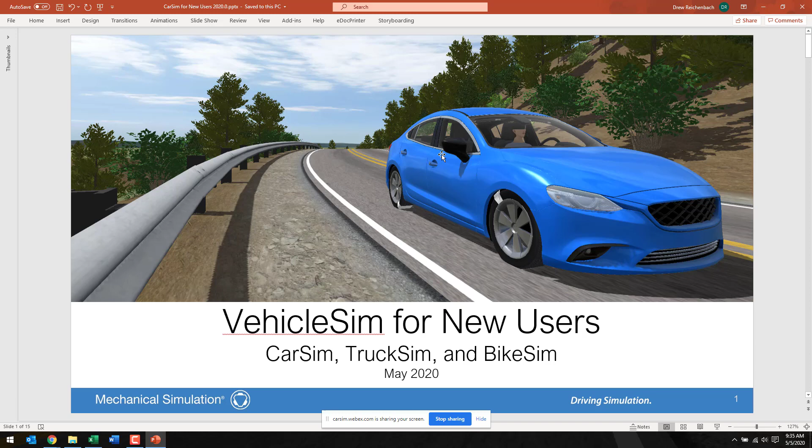I was only looking at this slide while I was talking, so it works out. Interestingly enough, this is actually a screenshot from our animator that we took on one of the roads. One of my coworkers found a really good camera angle, and so we added in a lot of trees and things to make it look pretty, and took a screenshot. I've liked it so much that I have stuck it as the first image in the training slides.

All right. So here is the overall agenda that I was talking about. We've got the introduction where we're going to talk about the parts of the software, navigating the user interface, documentation, help, where to find them, how to use them, and running some basic examples, just to kind of get started. So it will be hands-on. There'll be some switching on my part back and forth between PowerPoint and the CarSim user interface to show everybody how to do that stuff.

We've also got some discussions on the vehicle model, where it comes from, parameterizing it, configurable functions, kind of an overview of everything in there. If we were to go in detail into the vehicle model, we would probably spend about 100 weeks because there's a lot of different choices, and it really all boils down to we have to be able to simulate the types and sizes and design of all of the vehicles currently on the market, plus things that people are still inventing. And so that means that the model is pretty extensive, especially now that we're moving into the ADAS and autonomous vehicle kind of environment.

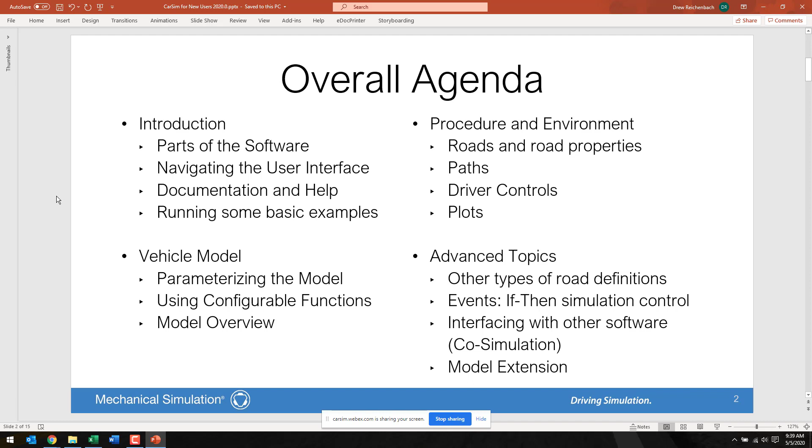And so I expect to get probably through the introduction portion today. And so today's agenda is going to be focusing on the introduction. We'll talk about the parts of the software, get some basic terminology, some jargon down, so that when I say database and you guys hear database, we're all thinking about the same thing, at least as far as CarSim goes.

We're going to do some navigating around in the UI. This can be one of the parts where there's the steepest learning curve, just in terms of making sure that the input you put in gives you the simulation that you're looking for. We'll talk about the documentation and help and things like that, and we're going to run some basic examples. And I've got two of them. I've got one that I call an example, which is putting some new tires onto a hatchback. And this example, we'll work through it together.

And then I've got what I call a task, and it'll be modifying the center of gravity on a utility truck. And that one I have more designed as I give you some basic instructions, and then I turn you loose to work on it for a little bit. And then we walk through it afterwards, because it's sort of one thing when we're all talking and going through it together, and it's another thing entirely to have to synthesize the information to do something a little new.

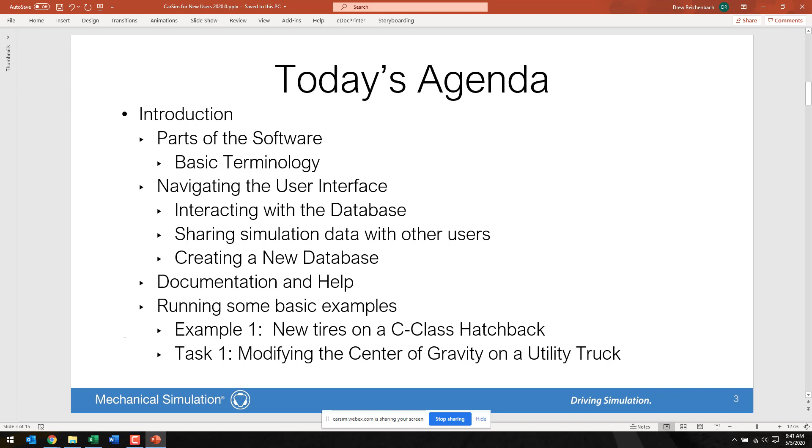All right, so let's really dive in then. Start out with, what is CarSim? So CarSim is a tool for simulating vehicle dynamics, so really the vehicle response to various inputs. There are three main parts. There's the VS browser and the database, and that's the user interface and how you can parameterize your vehicle model. There's the VS solver program, which actually takes the parameters and runs the simulation. There's the VS visualizer, and that is for animation and plots.

And you can do animation and plots together, which actually turns out to be really very useful when looking at the vehicle response to what you're doing, because you can see both the state of the car visually, which conveys a lot of information, as well as what's going on in the output plots. And you can see how they're kind of connected here.

The browser has some camera information and animation information, which it passes to the visualizer, and the model information to the solver, which when you execute it gives you simulation results, which also feed the output. So the three main parts really are the browser, the solver, and the visualizer.

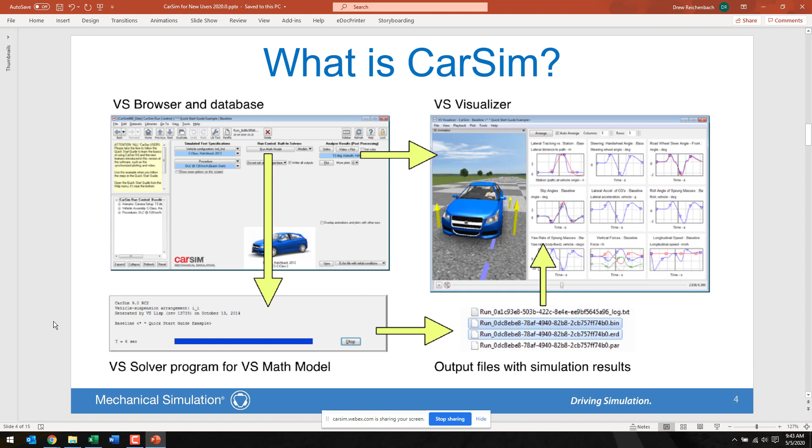So we'll start talking some useful terminology. So to start, I call it the VS browser. VS stands for Vehicle Sim, and it sort of is the umbrella for CarSim, TruckSim, BikeSim, SuspensionSim. Anything that sort of works commonly across the tools tends to get the prefix VS for Vehicle Sim. So the browser is the name for the user interface, and as you'll see, it has a lot of the feel of a web browser.

There is the solver, the VS solver, right? And this is the one, it uses numerical methods to solve the dynamics equations, right? And it's one of the most important parts about working with CarSim or any vehicle dynamics simulation tool, is to remember that we're not actually driving a vehicle. We are driving some equations, and the inputs are going to be discrete instants in time.

And so where the real road might be smooth or might have bumps in a certain pattern, because we are sampling, although we're sampling at a very high frequency, 2000 hertz, we are still sampling. And so we can only really respond to dynamics right within that frequency. And you can always decrease the time step, which of course increases the simulation time. But we've found generally that the default time step works for most systems. It is possible to make it stiff enough that you'd want to decrease the time step, but that's not very common.

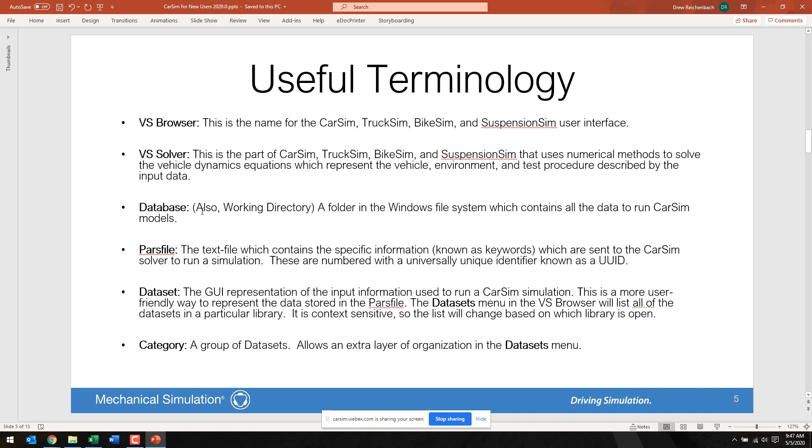We have something, I'll say category a lot, category and data set. Category is just a group of data sets. There's nothing really unique about it. It just allows an extra layer of organization in the datasets menu. So handling simulations can be grouped together, or vehicle information about a C-class hatchback can be grouped together, things like that. Makes it easier for us humans to find our way around in the database. Okay, a little bit more.

I'll say library an awful lot as well. And so the way the UI is organized is into libraries. And libraries will be for groups of data sets that focus on the same set of model input data. For example, you may have, say, a rear suspension kinematics data set for a C-class hatchback and also for a B-class hatchback, or a sports car, or a heavy truck, or a pickup truck. Those would all be individual data sets that exist in the rear suspension kinematics library. So it's a way to group them together. Sometimes we call them screens, or in the documentation we might call them screens, because each library has sort of a unique view in the user interface.

And there's something called a dataset link, and these are often called blue links, which when we look in the UI, you'll see when you form the link correctly, the color is blue. It's got two parts. It's got a ring control on the top where you can pick the library, and then the link itself, which is often below that, which serves to help you to connect data in different libraries together.

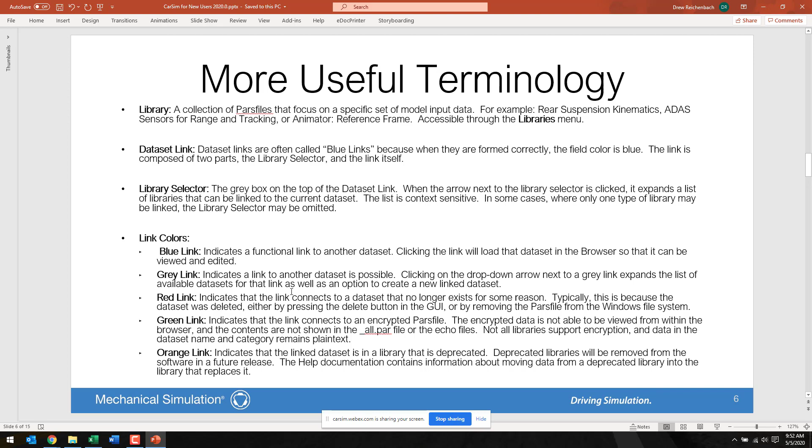But there will also always be some help documentation that says, here is how you go from the library with the orange link to its replacement. So there's always information on how to convert that. That is a lot of new terminology, but it gets us started and hopefully on a common playing field when we start.

That documentation is particularly important, and we'll use it a lot today, because a lot of the content in the vehicle model is modular, meaning if you don't have an ADAS sensor parameterized and installed, then we're not going to do the calculations for the ADAS sensors, and we're not going to write the outputs for the ADAS sensors.

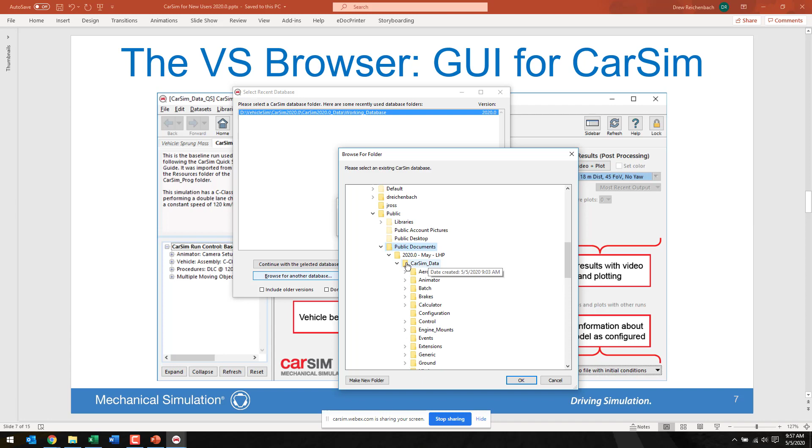So this is one of the default places. You can get sort of two cases. One is that will be installed if you install just for the local user, it will be in say my folder here. I installed CarSim for all users of this computer, and so it puts the database in the public documents folder. I added another folder level there, but you'll see a folder named CarSim data, and you probably have that one by default in that window.

So when I picked the database and clicked OK, it found it and it brought up the license setting windows. And this window, you can, if you've only got one license or you always use the same configuration, you can skip it. There is a box down here in the lower left-hand corner that says don't show this window when starting. And if you check that box, then whatever licenses you have checked out in this list will be the ones you always check out by default.

If you check the box and then find later that you want to change the settings, that's fine. You can do that from within the browser. But if you're doing maybe some testing that's driven by automation, you maybe don't want to see this window all the time, and so you can suppress it with this checkbox.

So I'm going to keep all of these licenses. This is my local machine license. There's also this column here called key ID. And the key ID is important.

That's your license number. And so when you call into tech support or you write into tech support, one of the first questions we're going to ask is, what is your key ID? It helps us make sure that the license is in maintenance, and it helps us see what features you have. So if I see in here that, for example, if I did not have a CarSim trailer license and I was trying to use trailers, then I would say, oh, the problem right here is that we need to add a trailers license to do what you're trying to do. And you can contact your account manager and they can help you out with that sort of thing.

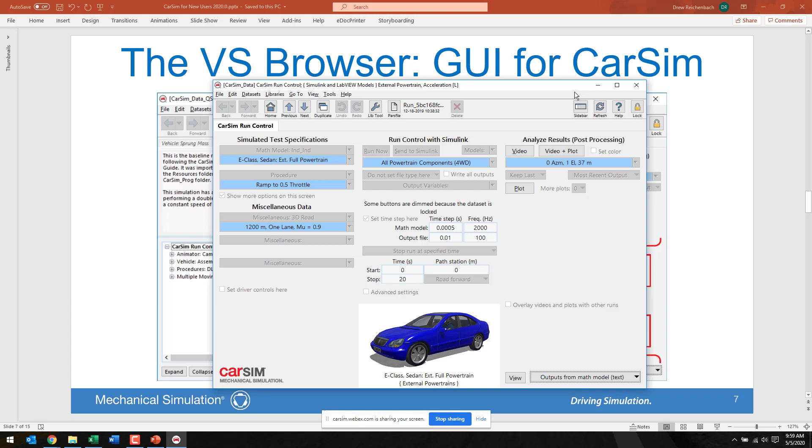All right, there we go. Of course, I was viewing a different data set in here before I copied it. So when it loads, you will probably see this view right here. I'm going to minimize the slides so it's not so distracting behind it.

Here we are. So this is the same view that I had sort of taken a screenshot of. We've got the test specifications and the center where you can run the simulation, and then the third column where you can see the results.

One of the things we do when we ship CarSim is just before we build the installer, we run all of the examples. That means that all of the example data, even if you don't have a license for them, you can at least browse and see how the data is configured in the database, and you can view the results.

So if you were going to use that trailer license to run a simulation, but you didn't have it yet, you could still see the trailer input data screens, and you could watch how that simulation would perform in the plots and the video. It's just that you couldn't run the math model.

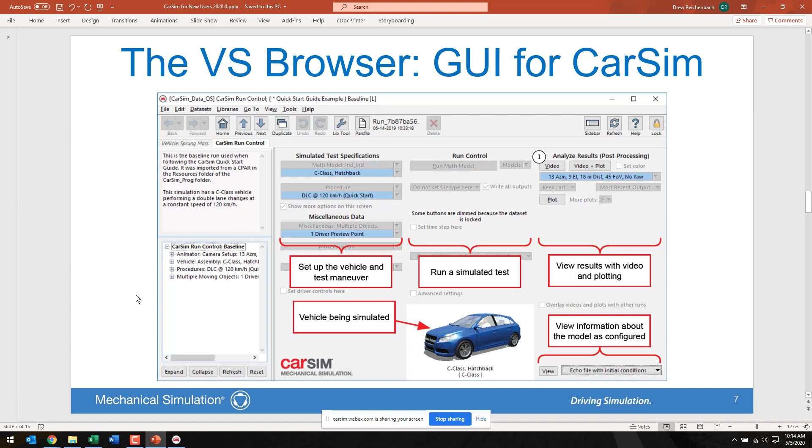When looking at the user interface, one of the key things is you can check up in the title bar for the window, and it helps that I can blow this up on the screen in PowerPoint. You'll see the little CarSim logo at the top, and then there's a bunch of information that is always useful so you can tell where you're at.

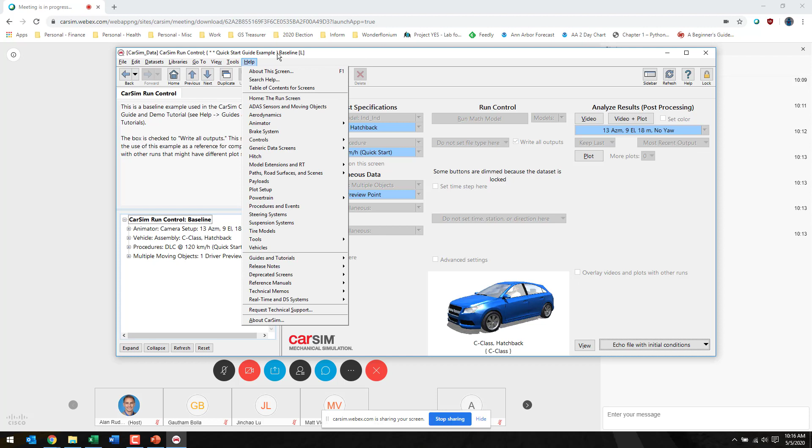As you go through the user interface, I'll switch back over here and bring up CarSim again. Let's see, let's make this, yeah, it's probably about as big as it can be right now. Up here in the title bar, I've got CarSim data, run control.

And if I was to pick another data set, here, let's do this one. You can see that in the curly braces, it changed so that the category is now ADAS and active safety, and the title of the data set is ACC, adaptive cruise control, 4-lane road with forward and opposing traffic. There's also this little L after the end, which means the data set is locked.

In this context, locked means read only. You can lock the data sets so that they're read only, and you can unlock them so you can edit them. Depending on what I'm doing, I'll either unlock everything or just unlock the thing I'm working on so I don't accidentally make a change.

I have spent like a day and a half one time trying to debug why something wasn't working, only to find that when I was gone, it was because my cat sat on the keyboard. So those things do happen. I've learned to keep my data sets locked when I step away at home.

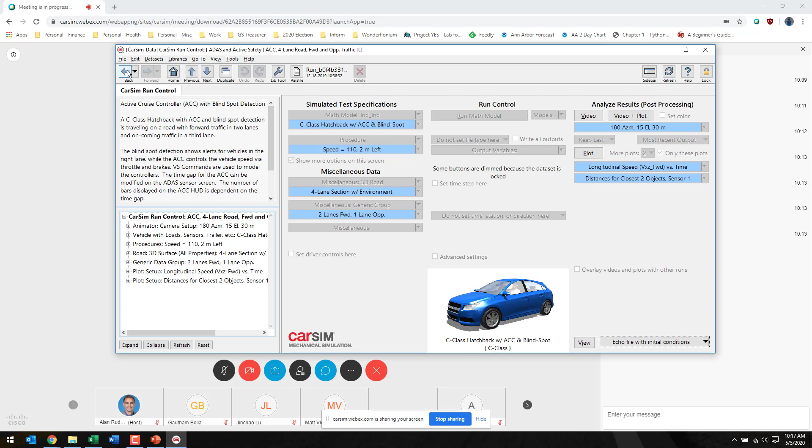All right, so I'm going to click the back button, go back here and go to the next slide so I can blow it up. The user interface works a lot like a relational database sitting underneath a web browser.

In that vein, the top button bar here, just below the menu, is full of buttons. There's a handful of buttons for controlling the data set you're viewing. I sort of called them view control buttons, though that's not really an official name. You can go forward and back, and like a web browser, that will take you back to the data sets you've seen before and then forward through the string. It's just a chain of data sets in the order you've viewed them in the browser for the current session. When you exit CarSim, that history goes away and starts fresh the next time you come back.

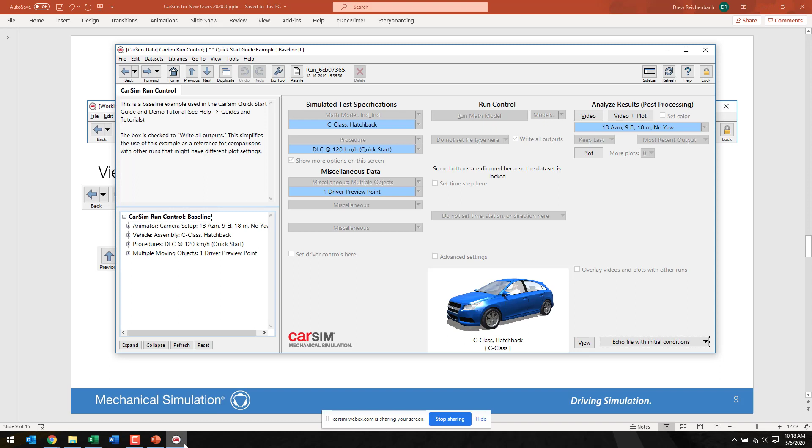The little arrow next to the back and forward button, like a web browser, if you click it, will drop out a list of all the things you've seen. So if I pull up the browser here, I visited 2 data sets, so I've got back and forward. If I click the drop down arrow, I can see that previously I'd also viewed that data set, or on the forward side, I viewed that ACC data set.

If I go forward and click it, the forward button will dim because I'm at the front, the top of the stack. And if I click the drop down arrow near back, this time it's got the 2 data sets in it. So pretty normal UI navigation as it goes.

All right. The home button returns you to the run control screen. So wherever in the database you are, if you're wondering how you got where you are, or even just, okay, I've made my change, I'd like to run the simulation, the home button will take you back to the run control screen.

And it's important to note that when you click the home button, it returns you to the run control screen, and you'll be viewing the last data set from the run control library that you had open, right? Which doesn't necessarily mean that it will run the simulation for the data set you were on previously. So if I'm in a vehicle, I can change which vehicle I'm looking at, and that doesn't change what's going on in the run control screen. And you'll see why that is as we really start diving into it.

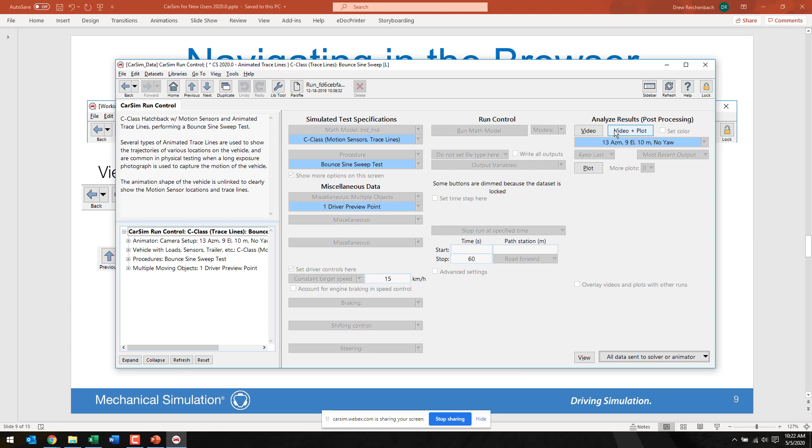But then previous and next. So if I look here in my datasets menu, this is my first one. The next one is this CS 2020.0 animated trace lines bounce sine sweep. And so if I hit next, that is the data set that's going to show up. And if I hit previous, it will cycle back upwards through the list. And these are in what I call computer alphabetical order, right? So alphabetical order, and star space comes before A. And we use the asterisks to indicate something of importance.

So for example, in the run control library, you'll see a group of categories that have CS 2020 in front of them. These are examples that were new for CarSim 2020. And so when 2020.1 comes out, our next release, these will all be sorted down into these various categories down here, and there'll be a new group up here that will say CS 2020.1 and then have a description. We always use two stars before the quick start guide example so that it's at the very top. And then there's this category here, more examples with extra license options.

These are examples that specifically require not only possibly an additional license on our side, but a license to run the related software. So you can see here there's a powertrain example that also requires an AVL Cruise license, or one where the powertrain comes from GT Power, from Gamma Technologies. There's a bunch in here, MF Swift and MF Tire. These are all tire models, which would require a license from, heavens, they were called Tass. Now they're called Siemens, I think. Or this one here from Michelin, TameTire.

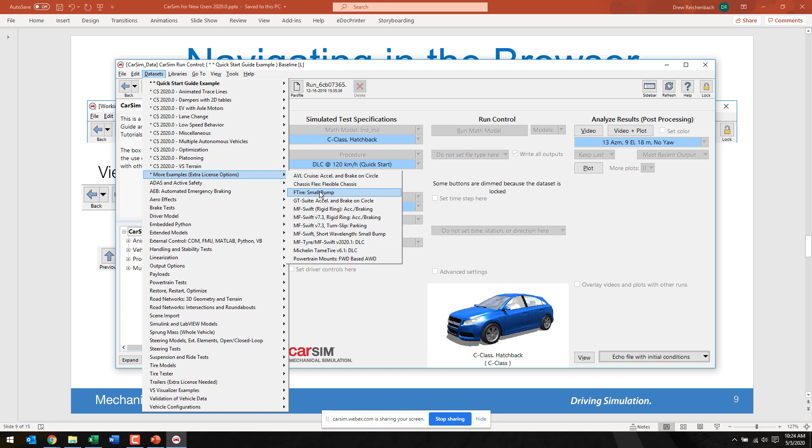And so in order to execute those, you'd need an additional license. But like all the examples, like I said, we run these, so we have licenses for all of them. And so, even if you don't have this FTire license, you can still see the video. You can see the buttons are not gray. You can still view the video and look at the plots to see sort of how the simulation ran.

All right, so I'm going to click back all the way up. Yep, back to baseline. Okay. There's a sidebar button, and that's this one over here. So this is over on this side right here. And I usually leave the sidebar open. If I'm shrinking the sidebar, it's usually because I'm trying to have two things up on my laptop monitor at the same time, a document and or an email message or something, and the CarSim window, or two CarSim windows, I guess, or some controls code or something, and the CarSim window would also be an option.

And the sidebar is this area over here. It's got a field up at the top that's got what we call embedded notes, and those are just some text information that goes with the data set. So when we use it, we usually use it for things like a description of what is special about this simulation, special enough to make us include it in the shipping database. But I've seen from customers, a lot of times it will say, I got this data from Bob, here's a link, and this is version 1 of this data set, right? So they'll use it for data source information or other things like that. And so you can write whatever you'd like in there.

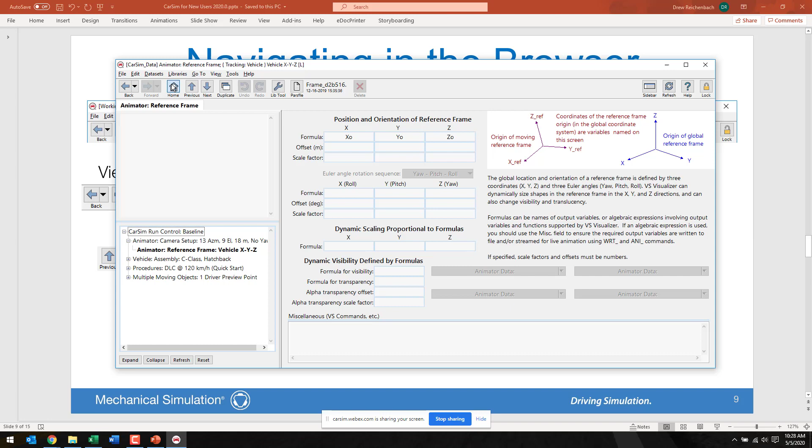And so here I've kind of hit the bottom of this particular chain because there's no more blue links. And so I can either use the back button or I can use the home button. Either one would be fine to go back up to the run control screen. So I'm going to press the home button because it's one less button click. All right.

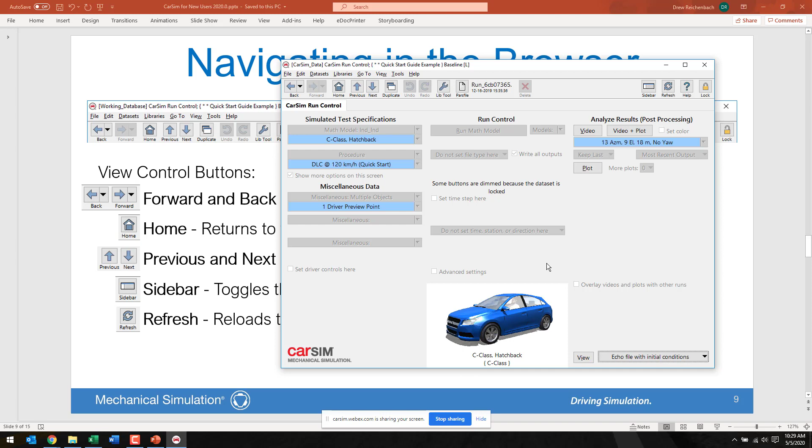Oh, got a little sidetracked, but the whole point of that is that the sidebar button, if I click it, will make the sidebar go away. And so you can see that whole area disappeared and I'm left kind of with the page. If I click it again, it's a toggle. The sidebar will come back. You can actually adjust the size, so I can make the sidebar a little bigger or smaller as I need to. And if I want to spend more space on embedded notes, I can adjust vertically as well by dragging.

There are some buttons at the bottom of the tree view. Expand and collapse will expand all and collapse all of the linked data sets. Refresh: if you've changed the linked data sets in places and it doesn't seem like the tree is quite following what you're doing anymore, clicking refresh will start back at the top and recrawl through them and correct any changes in the tree. And reset does that and also collapses it back up into the short form.

Refresh is also occasionally needed. I find that what refresh does is it will go to the Parsfile and reread it and then reload the GUI screen with the information from the Parsfile. And I would say most times, most actions that you take in the GUI will cause a refresh automatically.

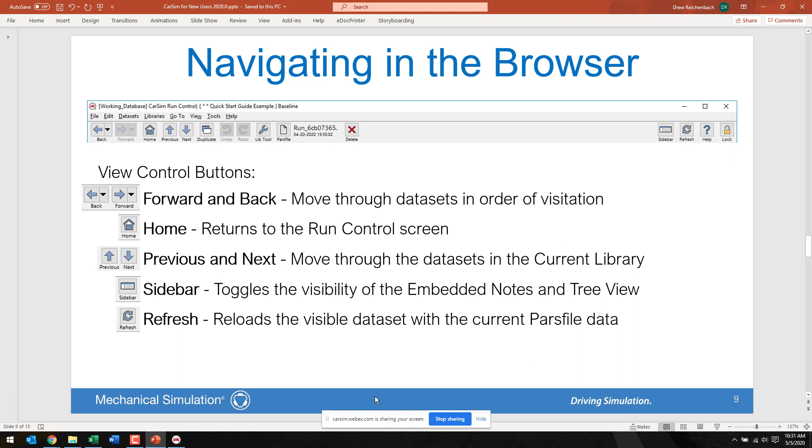Okay, so those are sort of view control buttons. Next, we have, I call them sort of database control buttons. These are going to actually do things. So now that I look at this list, I want to work backwards up through it. So I'm going to start at the bottom, lock and unlock. I have those shown as two sort of states, but it's only one button. So if you look up here, there's just the lock button with the unlock picture on it.

If I go to the UI, you can see it up there. If I click it, it will unlock. So the picture of the lock changes. So now it's an unlocked data set. The data set is no longer read-only, and I can now make changes. I can type notes in it. On the run control screen in particular, you'll see a message if I relock it there. Some buttons are dimmed because the data set is locked, right?

So I can't type new information in the embedded notes. I can't check or uncheck any of the controls. But if I unlock it, I am free to check and uncheck boxes. I can add more notes to the embedded notes over here, or whatever. Let's just do it. More notes. Stay there. I can do all of those sorts of things. And so when you load a database for the first time, everything is locked by default.

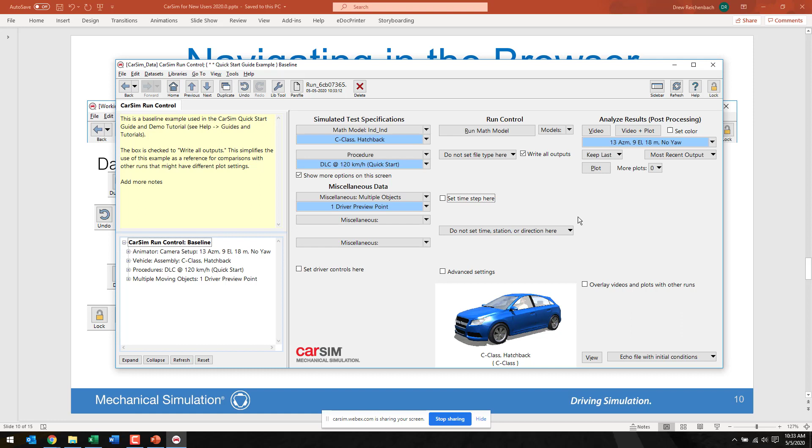And as I mentioned earlier, you can either unlock selectively if you're just going to go in and make kind of a surgical edit, or if you're going to be sort of working wholesale in the database and you want to change a lot of stuff or relink things, then if you go up to the Tools menu and you go about 2/3 of the way down, there's a little group here that says lock everything in the database and unlock everything in the database. And I'm going to click unlock everything in the database.

It gives you a confirmation window because if you have a lot of data sets, this can take a moment or two. So there we go. And so it says here, right, I finished. Every data set is now unlocked, and that's 4,767 files. Now that is total in the database to run all of the different simulations that are available from that run control screen. An individual simulation certainly uses many less files than that. So click OK.

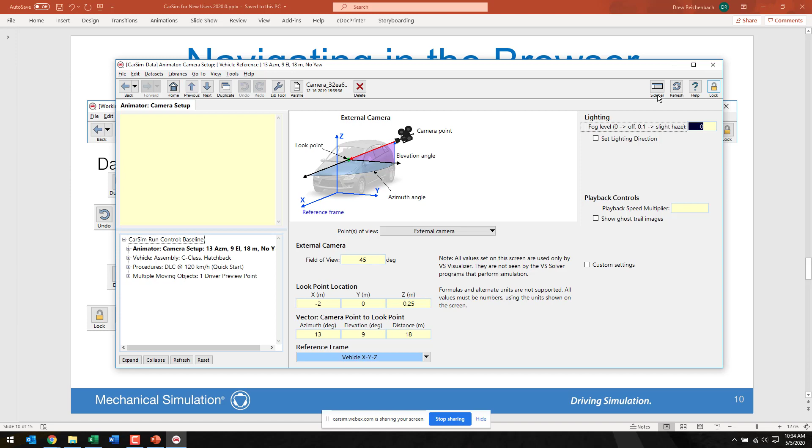All right, and so now we've got the database unlocked. And now if I was to click the link down for the post-processing there, you can see now these fields here are also yellow, right? This data set is also unlocked. Let me go back. So all the data sets in the database are now unlocked. Undo and redo. So now I'm on the second line here, right? So as you make changes to the database, undo and redo will keep track of that.

And the two important things to know are undo and redo are specific to the library that you're viewing. Meaning, if I make changes on the run control screen and changes in the vehicle, if I'm looking at the run control screen and I press undo, it's only going to undo the changes to the run control screen. And that is intentional, right? We don't want you accidentally undoing a change on a screen you can't see.

And the other thing is that the stack is cleared when you exit the software. So when you close it completely, you'll get a warning that says when you exit the software, you're going to lose your undo information. Are you sure you want to do this? And probably at some point you'll say, of course I'm sure. You'll close it and you'll say, wait a minute, I just wanted to go to a different window. It happens all the time.

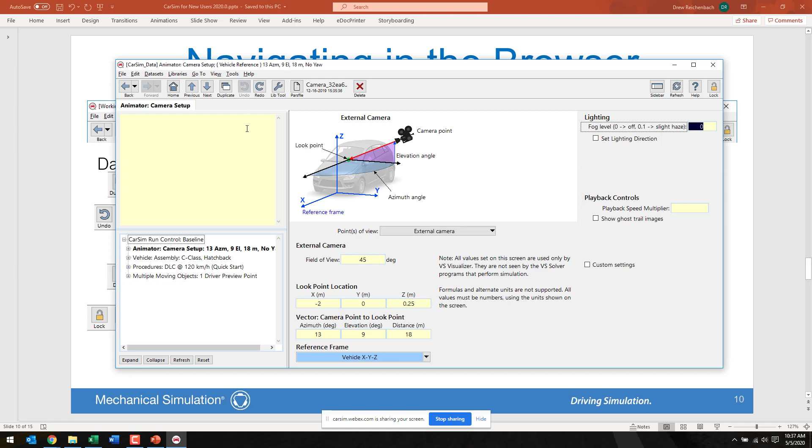Sort of normal operation. But if I was to instead check and then go to the camera and show ghost trails and go back and then uncheck, and then I hit undo. If I go to the camera, ghost trail images is still set, and I can click undo here separately. So it keeps that information, you just have to be on the screen in order to undo something for that screen, which is probably about what you would hope for.

All right. And then the next two are for getting yourself a new data set and getting rid of an old data set. Okay. All right. Window here.

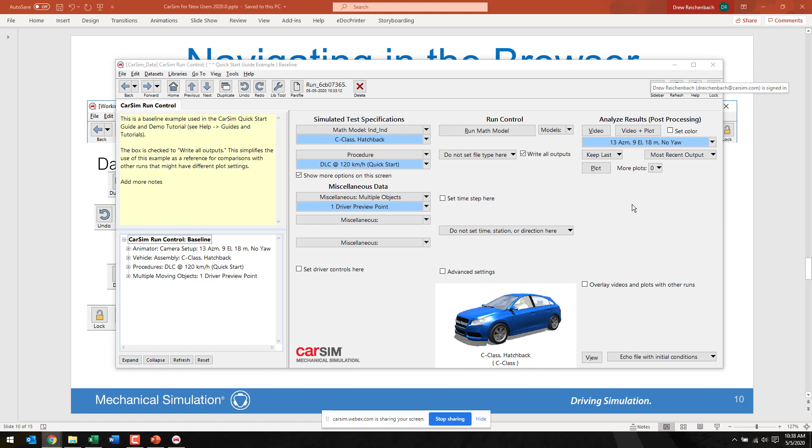Okay. The duplicate button will take the data set that you're looking at and will create an exact copy of it. The only thing that will really be different is that you can change the title information, and it will have a new UUID. You can see right here in the top of the bar, it says run underscore, and then it's got some numbers, and that's a prefix and then the UUID.

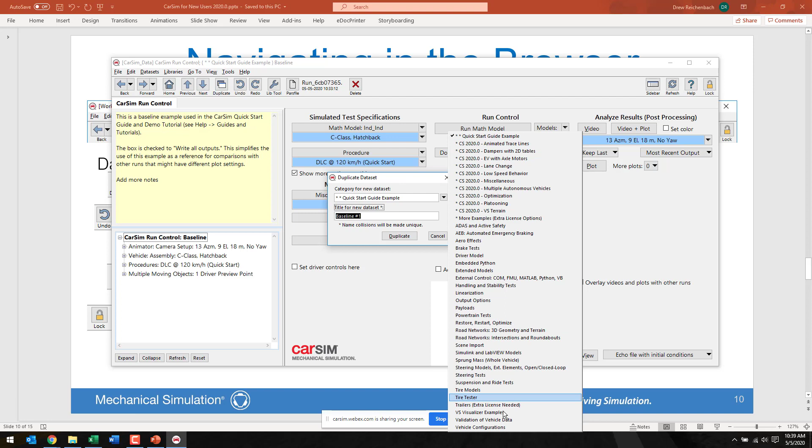And so if I press the duplicate button, I get a little window that says duplicate dataset. It lets me pick a category from the list of available categories, or I could type in a new one. Something like that. And I could give it a new title. And you can see here the default is to keep the same data set name and then append a little #1 to the end. And it's smart, right? So if I duplicate it again, I get baseline #2 and baseline #3 if I keep going.

And it's a very common workflow for people to just make copies of stuff and leave the #1, and then go through at the end when they've figured out what they want to really do, and clean up the data set names so that they are more meaningful to them. So in this case, I'm going to play with the computer alphabetical order a little bit. And I'm going to number the data sets so that they just show up in order of when we did things.

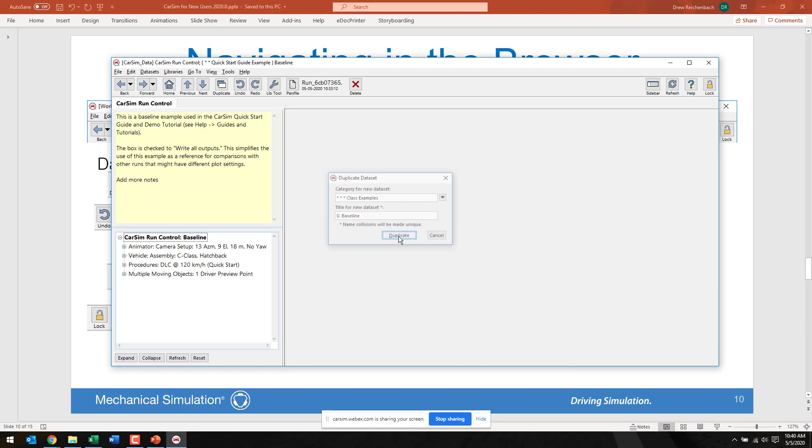Press duplicate. And so if I go to the data sets menu, I can see class examples and my new data set 0 baseline is there, and I'm viewing it. If I hit the back button, I'll go back to the quick start guide example baseline, and it's exactly the same, right? All the way down to the fact that I wrote add more notes in the embedded notes.

One thing to also remember is that when I've pressed duplicate, I'm only duplicating the visible thing. Because the rest of the simulation is linked, right? Rather than sort of part of this, it's just a connection to it. The connection was duplicated rather than the data underneath it. And so if I follow a link and then change it, anything that is linked to that data will also change.

And this is a theme that we will return to a few times today because it's, I think, one of the most important to making sure that you can compare two cases. If you want to compare a baseline case to a case with the controls active, you need to be able to create two completely separate simulations. And so duplicating and linking things correctly will be important.

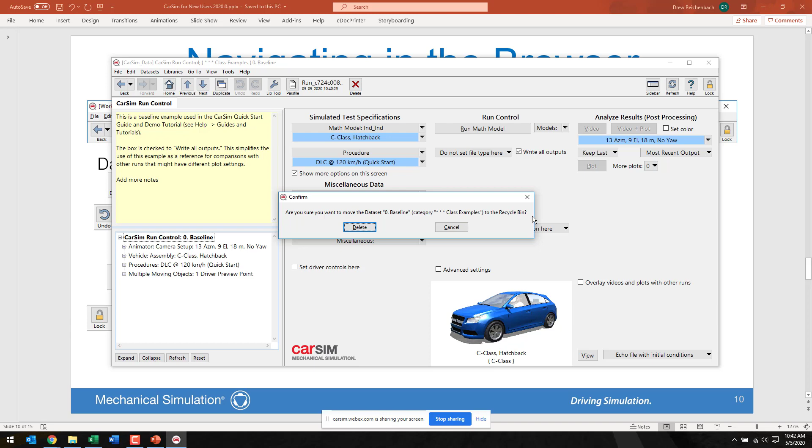And the last button is, of course, delete. And that will move the data set to the Windows recycling bin. So if I press delete here, it will say, are you sure you want to move this to the recycle bin? And if I say yes, you know what I'm going to do? I'm going to make sure my recycling bin is empty first. So who knows what I've got in there. Cancel, do that. Empty recycle bin.

Oh, you're not emptying because you're really full. That's why. Yeah. That's what I thought. I have a very full recycling bin. It probably has a whole database in it somewhere. But I'll let that go in the background.

So when you delete the data set, it will move it to the recycling bin. And so if you find that you've deleted it by accident, you can restore it. If you go to the recycling bin and then you send it back to the database or move it back to the database, CarSim will be able to re-access it.

If you do that, yes, I am sure, you'll want to go to the Tools menu and use reindex, probably the entire database. It only takes a moment, and what that does is it will re-examine all of the individual Parsfiles stored on the disk and reconstruct basically the index that runs all of these dataset menus so that you can see your file back again.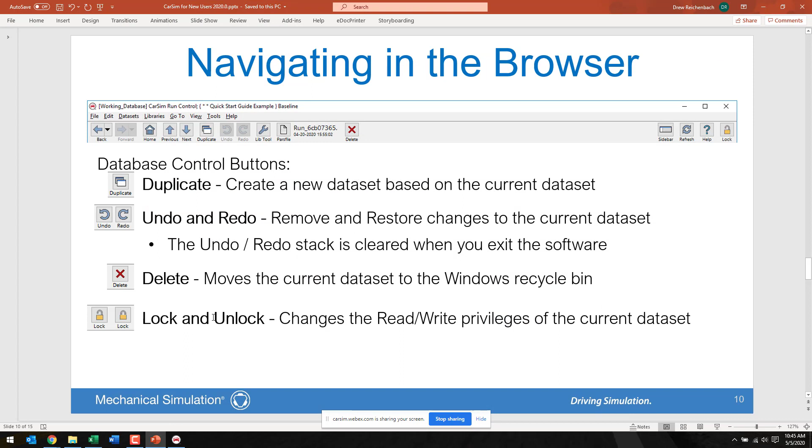All right. Three more buttons left on the button bar, which get a bit of a brief discussion. So there's one, the library tool. It's got the little wrench. That gives you a window here that looks like this that you can use to take some sort of bulk actions on groups of data sets. It's what I use when we're sorting this stuff out.

If I wanted to take both of these data sets and give them a new category, or I could rewrite them or make an entirely new database from them. I can export them, and this is something we'll talk about later, but it's a way to share things with other users. I can bulk delete or lock or unlock, and so I can go sort of by library.

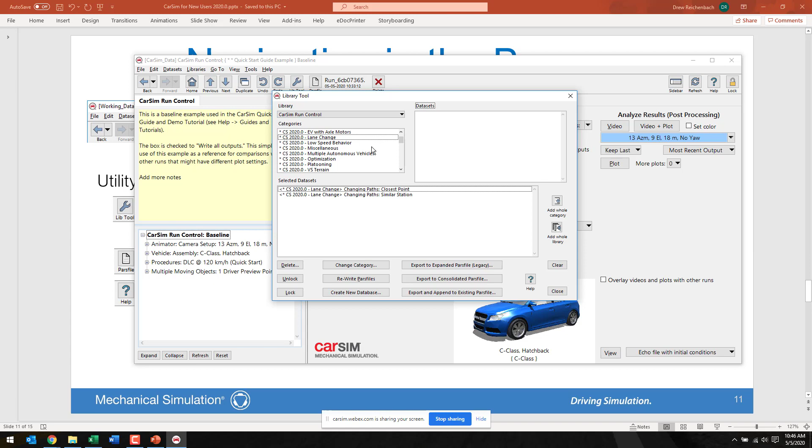And so this one here, I'm looking at the run control library, but I could also be looking at, say, something actually good. Brakes, 4-wheel system. So I could be looking at the data sets in the brakes library, and I could be using these data sets as well. All right.

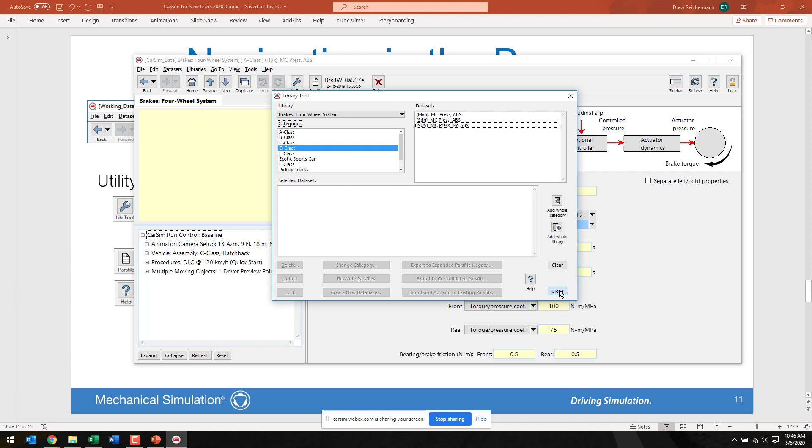There's also this Parsfile button. So that's this one here, this guy right there. That opens the Parsfile for the current data set in a text editor. And we ship a sort of freeware program, I don't even know that it's updated anymore, called ConTEXT.

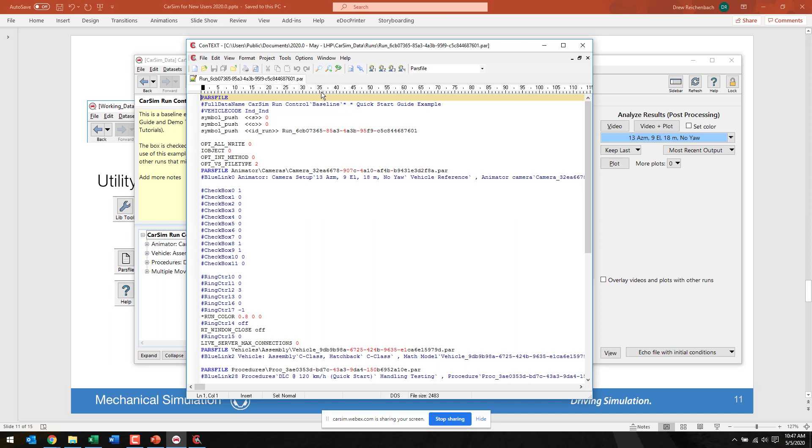If you have a different text editor that you prefer, I'm not going to step in. I don't have a horse in that race. I have colleagues who prefer VI, some who prefer Emacs, some who prefer Notepad++. You can use the text editor of your choice, and you can see the Parsfile. And so you can see there's a lot of stuff that goes kind of behind the scenes.

Here's some keywords, right? For example, here's an IOBJECT 0 keyword. Here's what a BlueLink looks like behind the screen, right? It's got a statement. Here's a new Parsfile, and here's its path inside the database. And then right below that, there's the information associated with the BlueLink. And we've got the embedded notes. So those are part of the Parsfile right here. See, here's the thing I added. Add more notes.

And we've got a log entry. So when this data set is read, it'll write an entry in the log. And then it's got some metadata down at the bottom that talks about where it's found, what the file ID is, what product it came from. And that's really useful to know.

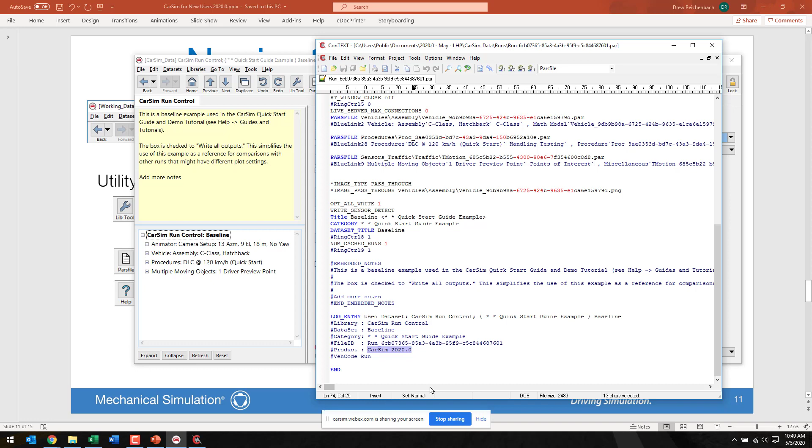Because if you have a CarSim 2020.0 database and try to open it in a newer version, say CarSim 2021, it would update the database and make some changes, adding keywords for the release. So it upgrades the whole thing to the new version. You can't go back. I can't take this CarSim 2020 data and use it in CarSim 2019. The changes are backwards compatible, but not forwards compatible, because we couldn't predict what we were going to invent in the future.

That is a question we get occasionally: I upgraded my database and didn't save a copy, but now I want to go back to the old one. Unfortunately, the only real way to do that is to recreate the data sets by hand. So I fully recommend keeping a backup of your database. In fact, the database upgrade process itself will give you a dialog that says we recommend saving a copy, and we can do that for you automatically. If you say yes, it will duplicate your database and save a copy for you as part of the upgrade process.

All right, let's close this.

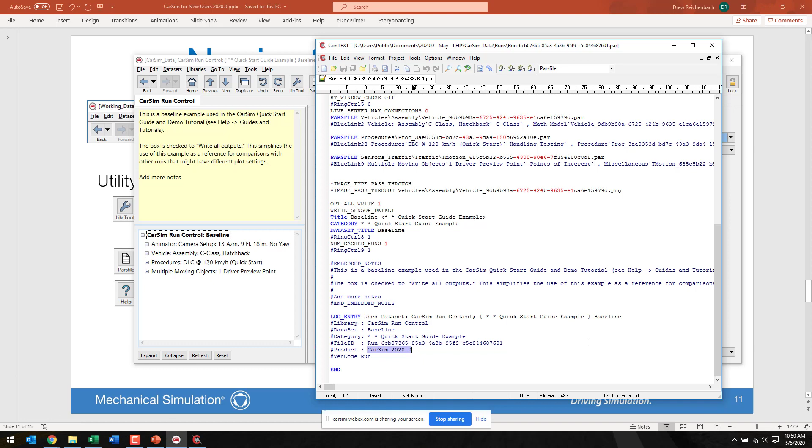And then last, but certainly not least, something we'll hit on a lot, is the presence of this help button in the upper right-hand corner. This accesses the PDF documentation associated with this library.

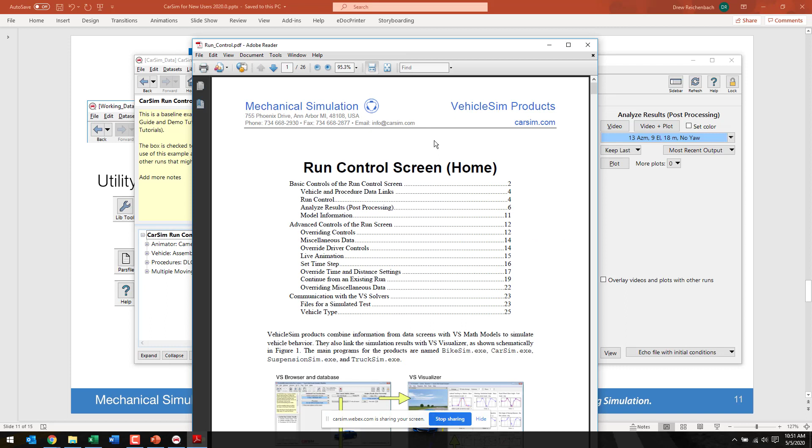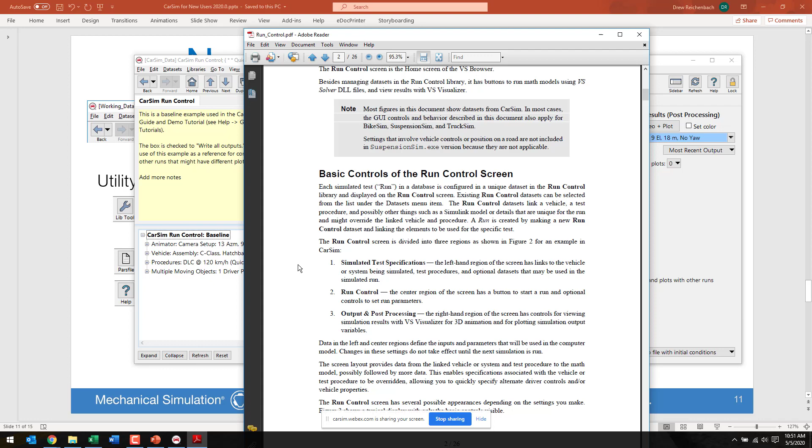So if I click that, it will bring up a PDF document about the run control screen. It's got a graphic that looks familiar here, and it has information about what it displays on the screen. It'll also have a lot of these screenshots covered in little numbered circles, so that you can see, okay, number 1 is the vehicle or system link, and that corresponds to this field here. So it really links - here's what all of the different fields do.

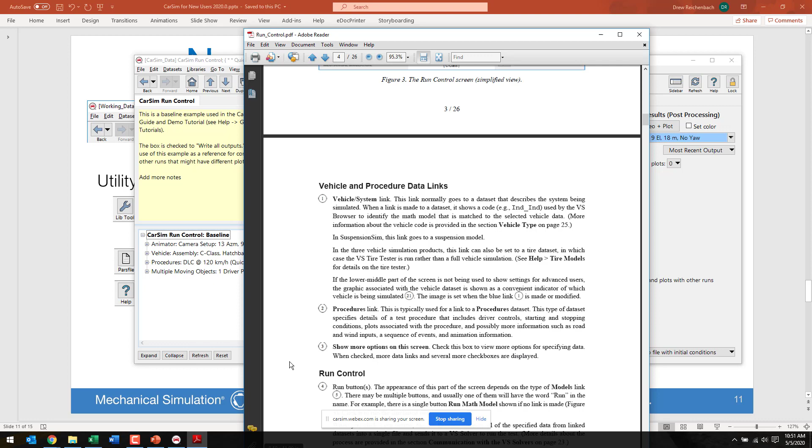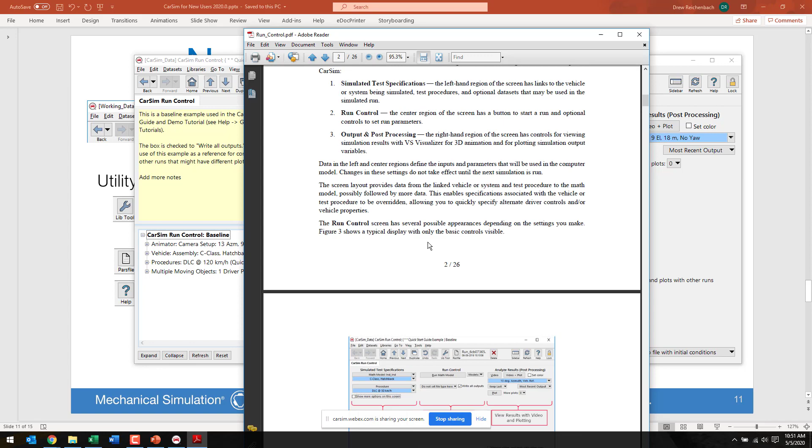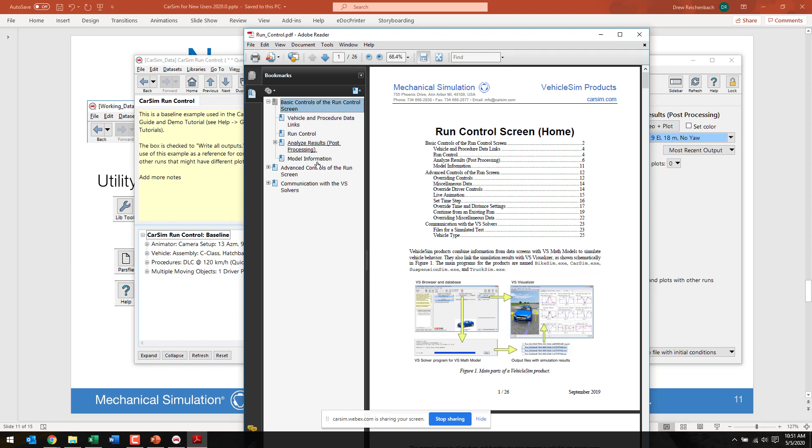And the button is context sensitive, so whatever library you're in, it will open the appropriate documentation. And the PDF documentation is also indexed, so if you're looking at it in Adobe Reader, you can see that it builds some hierarchy into it with the bookmarks so that you can jump to sections of interest.

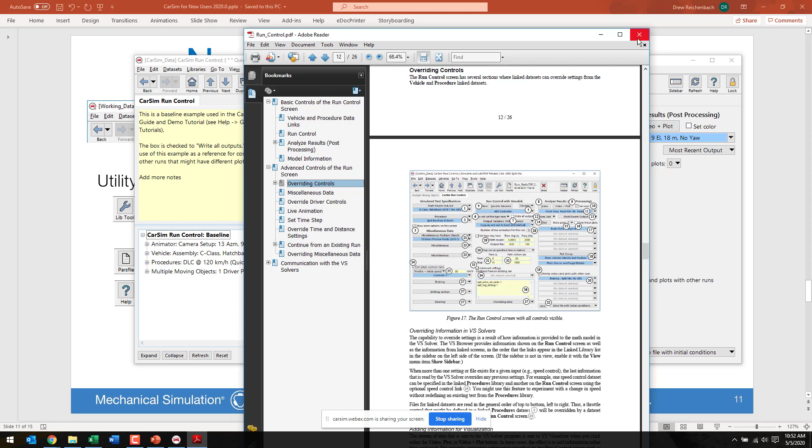So close that. All right, so that's the high level basics of moving around in the browser.

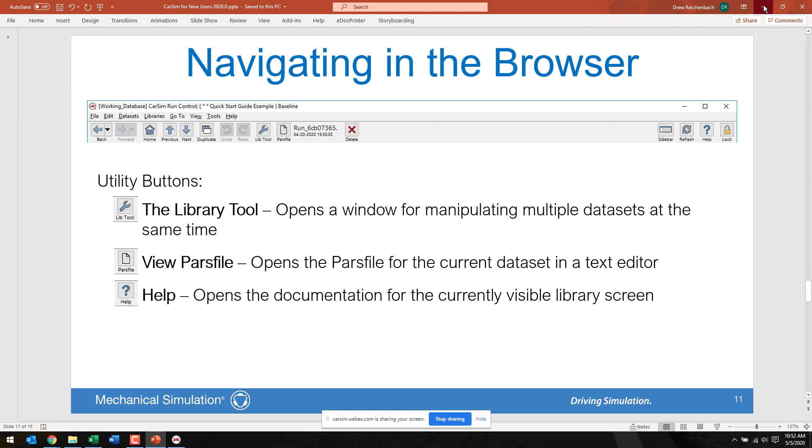I'm going to minimize that for a bit and go back to the UI. So I said before that the browser operates a lot like a web browser, kind of stacked on a relational database. The thing with data sets is that they all have this many-to-many relationship. So I can have a single run control screen linked to a vehicle, or I can have multiple run control screens linked to the same vehicle. Or I can have a vehicle, for example, that is linked to many run control screens that links to a tire. And that tire could also be used by multiple vehicles.

And because the relationship works that way, when working through and configuring a new simulation, the process is to kind of go through, duplicate your way from the top down, and split the tree apart until you've got sort of two separate columns. Here's what I mean by that.

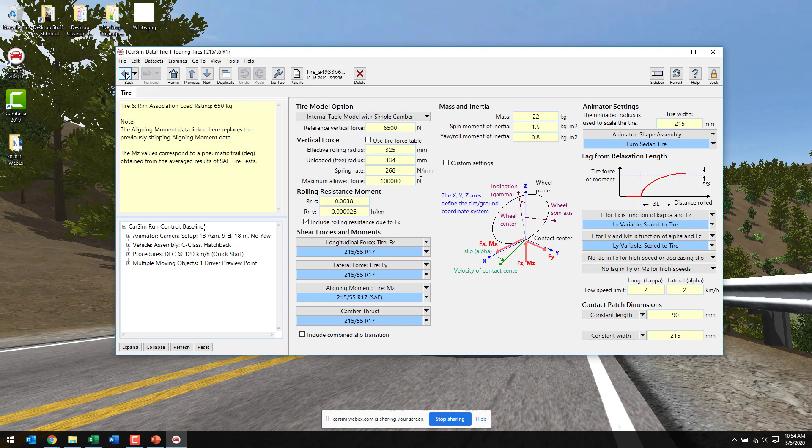So on this screen, we learned about the duplicate button, and that actually exists on every screen. So I could duplicate the vehicle, and I could duplicate the tire information, and then change it somehow, and then go all the way back up and run the new simulation, and that would give me results that I could compare.

Because this operation happens so frequently, and it's a multi-step thing, I would have to say, okay, if I want to create a duplicate of my C-Class hatchback, I'd have to navigate here, duplicate the hatchback, go back, and then link the duplicate to this screen.

That sort of multi-step workflow happens often enough that there's a shortcut for it. If, for example, the library selector for the C-Class hatchback, the blue link, is set to the vehicle's assembly library, and I click the arrow next to the blue part,

that shows me the list of available data sets to select from. So I could pick a new one, but if I want to start out with just a complete copy of the existing one, I can use copy and link dataset. And if I select that, it brings up a window very similar to the duplicate window, except it says copy and link dataset in the header and on the button.

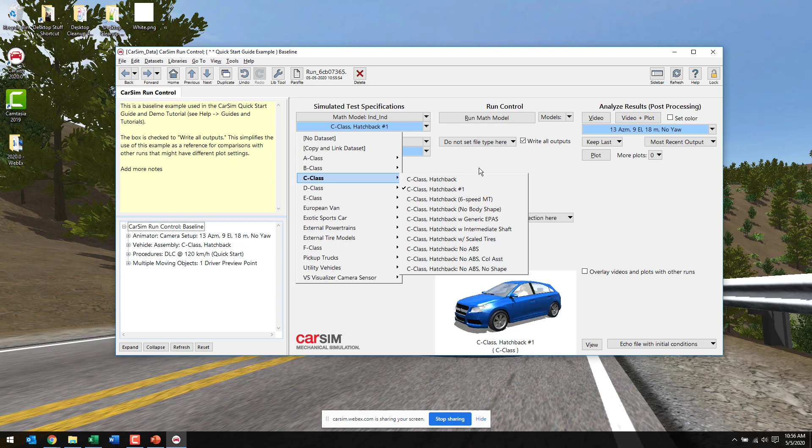If I follow the link, I'm here in my duplicate dataset. How is this different than if I did the process by hand?

I had a question: is there a way to maximize the CarSim browser to match the screen size? Yes. So I have mine set to medium right now. If you go to the View menu, there's actually a couple of choices. Normally, when I'm working on an external monitor, I probably use window size matches the system display setting, which means that however the Windows UI scaling is set, the CarSim window will be drawn appropriately.

The one that's grayed out is the one that matches that top option, so small and window size matches the system display setting would be the same. I have mine set to medium right now so it's a little bigger and easier to read, but I could also say maximum. Now it fits the width of it, it's bigger, and that will be sized appropriately for the window, including the sidebar.

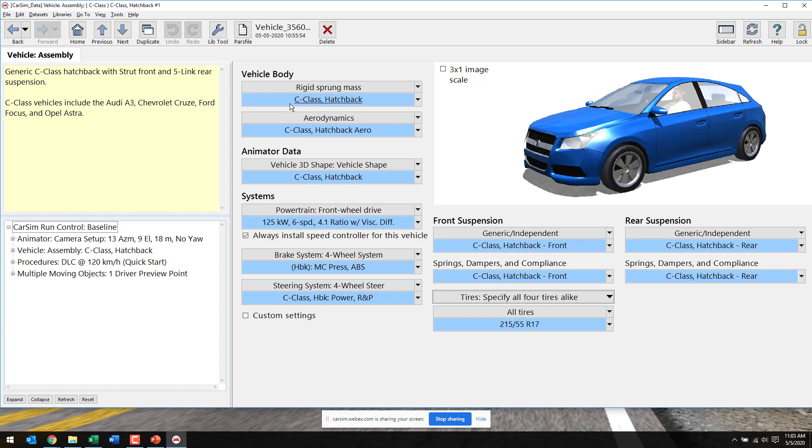But then the solver also has an API, so you can access it. You can write C code to call the browser functions, or call the solver functions, right? And that's all actually covered in the documentation. So if you go to help and to reference manuals, there's a couple of things, right? There's the VS API, which talks about the solver API. There's the VS COM interface, which is the browser API.

We have something called VS Connect, which is a new tool, which lets you do things like run Unreal Engine as your visualization tool, and maybe as the provider of the road surface, and the CarSim solver for vehicle physics, and a tightly coupled Simulink controls model, all together, right? And the big issue there is that you end up running the Unreal Engine and the CarSim solver asynchronously, because Unreal updates at the frame rate, and you want to update the CarSim solver much more frequently than that, so that you can get good information, and your time steps aren't too huge, for example.

So that's used a lot in things like driving simulators and things like that. But people are also exploring it for other tools, especially in ADAS and autonomous development tool chains.

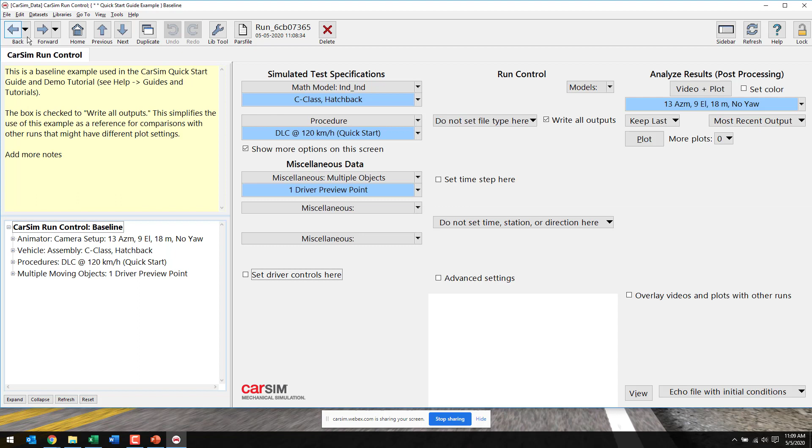So press duplicate. Now I have to go back, and you can see here the first back took me back to the original C-class hatchback. The second back returns me to the run control screen, and you can see that it's still linked to the original. And so then I'd have to go and link. So comparatively, it saves you a bunch of steps if you use copy and link, but you end up in the same place, which is you've got an exact duplicate of the link target. I call it the child data set, and the parent data set is linked there. So it makes a duplicate of the child and then relinks it to the parent.

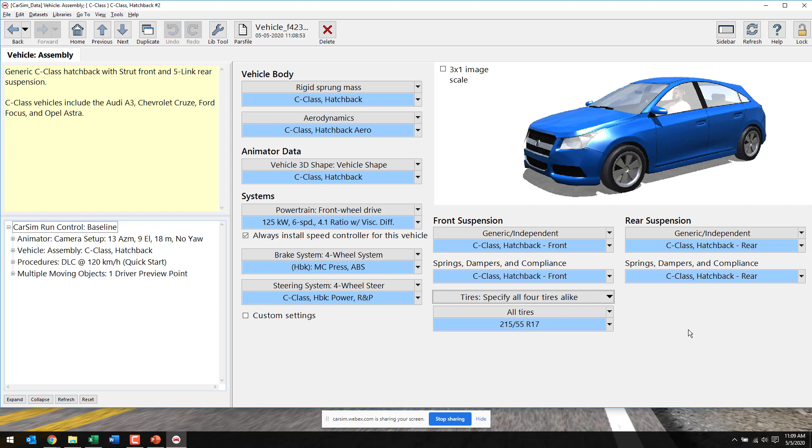Let's see here. And then if we wanted, you could then change the data on the vehicle level here, and it would make a different simulation since we have a duplicate of the data set. And in fact, that's what we're going to explore in the first of the basic examples. But before I do that, I want to talk about databases and things.

So the idea of creating a new database came up earlier, and it's definitely possible to do it. There's actually a couple of different ways you can go about it. If you want to just wholesale create a copy of an existing database, you can actually use the Windows File Explorer and just copy and paste your database folder and then rename it something. And it will then represent an exact duplicate of the CarSim database that you copy pasted.

And that's how I made, for example, well, it's in my public documents here. That's how I made this CarSim data folder here, is I copied my installation database and I pasted it here in this folder, and then I renamed it CarSim data so that it would match what you guys would see, except I have this extra folder in there.

But from within the software, there's also a couple of different ways that you can go about it. So if I'm here at the Run Control screen, I can go up to the File menu, and I can select New Database from this data set, and that will make a complete copy of everything needed to run this simulation. So from this parent all the way down through all the children and grandchildren, everything needed to run this simulation will get packed up and put into a new database where we pick.

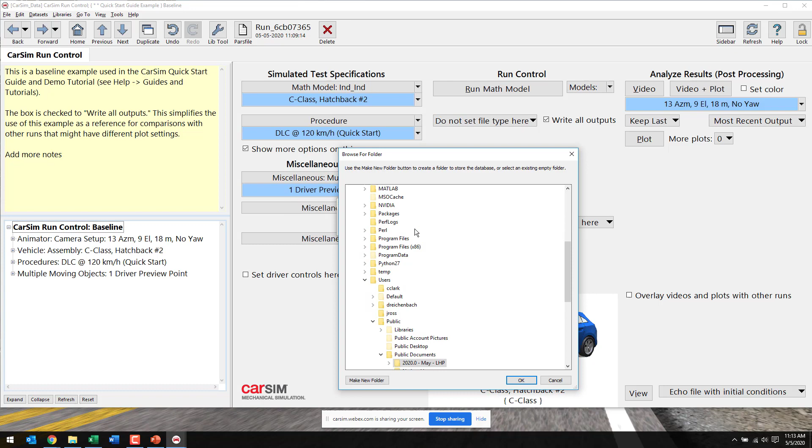And it lets you browse for a folder where you want to create the new database. And this is going to need to be an empty folder that you can use, that it will turn into the database. And so I'm going to select public. I'm going to select 2020, right? And below that, I've got just my CarSim data folder here.

So I'm going to make a new folder. And I'm going to call this training database. And so I've got an empty folder now called training database, and I'm going to click OK. I've got my new folder selected, and I'll click OK.

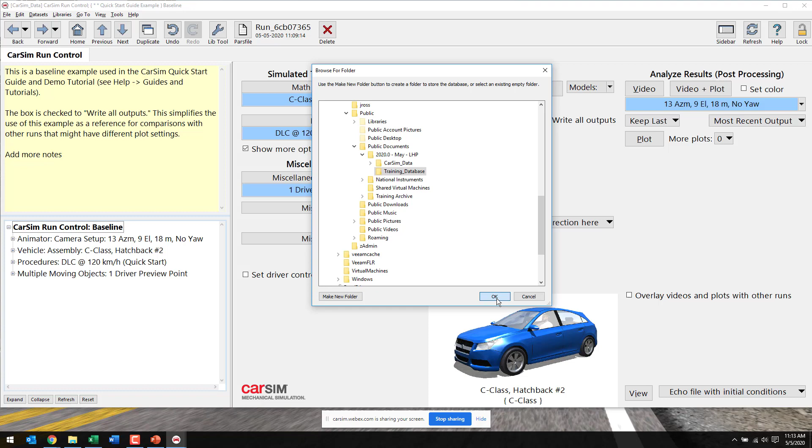And what this really actually does is it uses a couple of existing operations all sort of combined together. That's fine. Reindex and rewrite the entire database. And it makes sure when you import the data, it makes sure that the data is current for the version of CarSim that you're using. It makes sure that it is all good data, that you're not using any deprecated libraries.

It will let you know if the data you're bringing in is going to connect to a library that's going away, and things like that, which is why you got a couple of dialogues here. So it says every data set in your database has been rewritten, and that just makes sure that the Parsfiles align with the library information from the browser.

It took 8 seconds. The only time doing that operation takes longer is when you do the entire database, because there's some very big data sets in there for detailed kind of road situations, and those can take a while to regenerate.

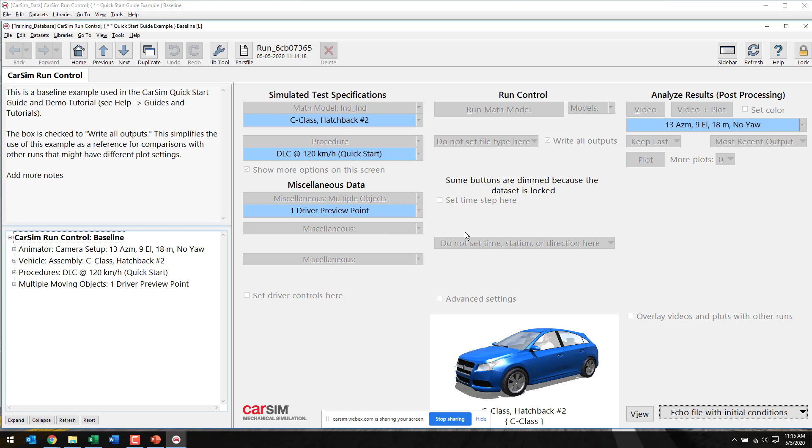So I'll hit OK. And so now I'm going to change my view size here back to medium. And I'm going to turn off the sidebar. This is one of those cases. So we can show it side by side here, sort of side by side anyways. I've got the two databases now, and you can see right in this window that's in the back, up in the title bar, it says CarSim data for the database. And in the window that's in the foreground, it says training database.

If I look at the datasets menu on the original database, there's many, many, many datasets in the run control library. And if I look here in the training database, I have just the quick start example baseline that I exported. Further, right, it's locked because it's a brand new database. And if I unlock it and I look for the vehicles, I only have C-Class hatchback #2, right? Because that is the one that was linked actively when I created this new database.

So if you have an example that you want to split off and use it as the source for developing a new simulation, this is one way you can go about it, especially if you want to keep it sort of isolated. I use it from time to time when I'm working on stuff for training examples and things. I'll say, okay, I assembled the bits that I wanted, but I want to shift it over to a clean database so that I can make sure that, just by using my other database, I don't change a data set and have my training stuff not work properly anymore.